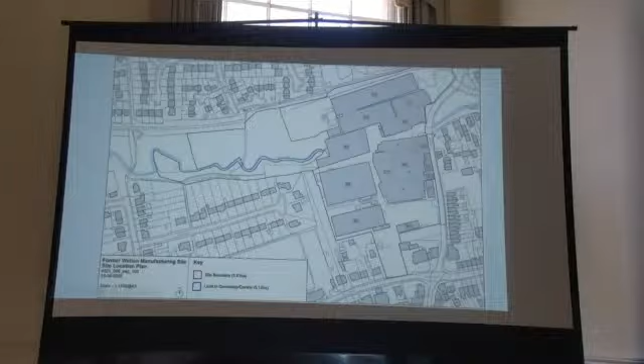Here we can see the existing site. It's the former Welton Bibby Bag Factory, just north of Midsomer Norton High Street, which is just to the south down here. We've got Station Road, which runs along the eastern side of the site, and you can see the red line boundary of the site just encompasses Station Road along the east here and goes around the whole of this wider site as well.

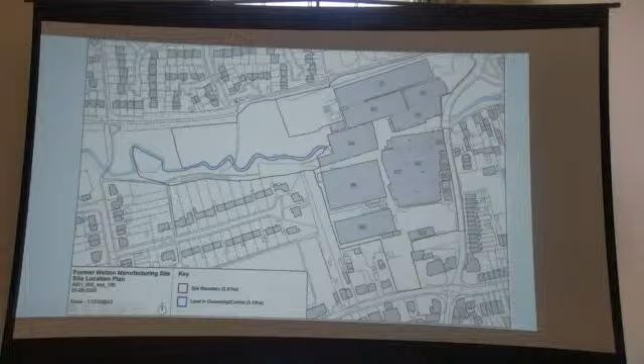We've got the Welton Rovers football club down here. We've got Welton Vale and the Midsomer Norton Conservation Area just to the east, the boundary of which runs up to and includes the facade of the brewery buildings, identified in this area here. I'll show you in a bit more detail, and then it comes around this building here and follows the road down.

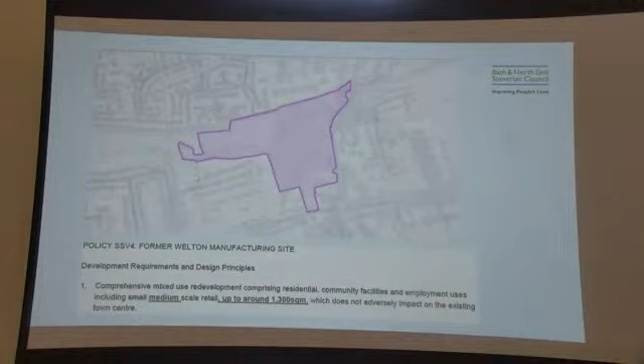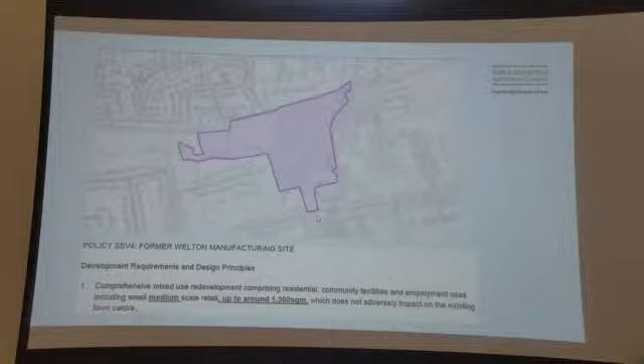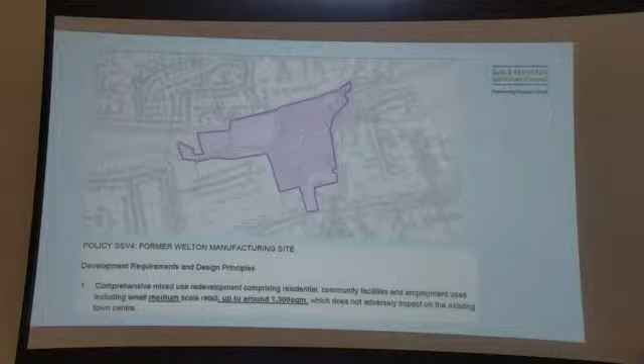The whole of this area outlined in purple here is part of a site allocation in the local plan partial update, SSV4, which requires a comprehensive mixed-use redevelopment comprising residential, community facilities, employment uses and a medium-scale retail use. Now, to be clear, this application is not for the wholesale redevelopment of the site. It is described as enabling works, and we'll come on to consider what that includes shortly.

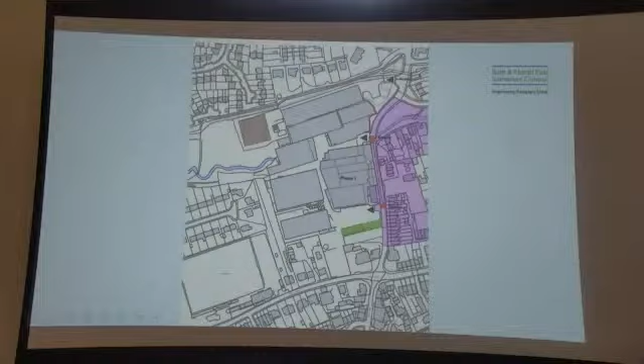Part of the application involves demolition, in this area here, labelled Phase 1. So it's all of these buildings here, which are an assortment of connected buildings of various ages, the most historically significant being these 3 buildings at the front, the tallest buildings, which form part of the former brewery building on the site. You can see in purple here the outline of the conservation area.

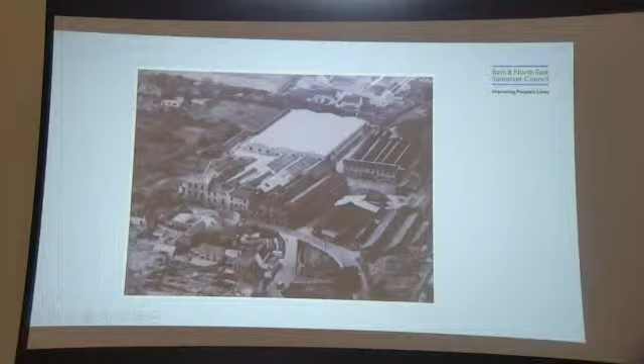And just some historical photos for a bit of context. You can see, obviously, the site has been in factory use for a long time, and you can see the brewery buildings when they were in a little bit of better state than they are today.

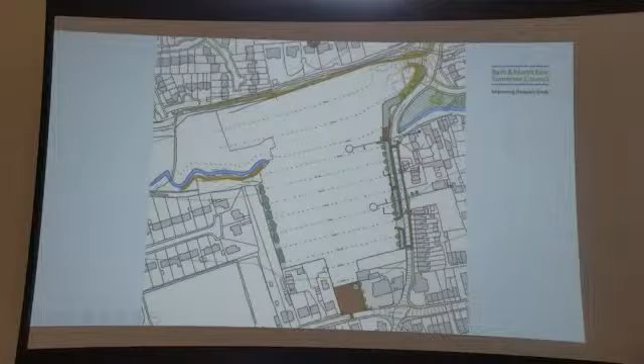But moving on to show in more detail what's proposed. So the eastern pavement would be widened to 1.8 metres. There'll be a new crossing put in here, just to the south of the northern entrance to the site. There'll be a new 2-metre wide pavement on the west side of Station Road, and Station Road itself, the carriageway, would be widened to 6 metres.

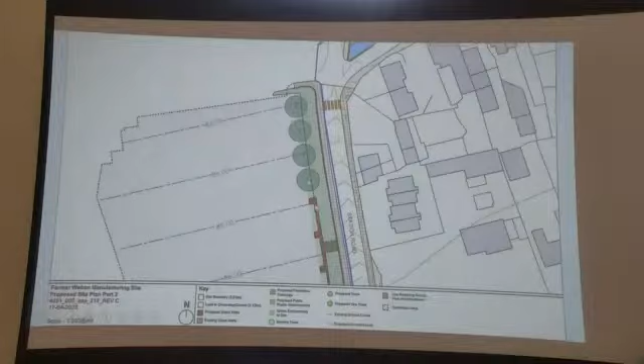Then there would be a low retaining wall put in place at the back edge of that pavement, with a grassed embankment behind, up to the level of the development platform that would be created at the back. And beyond that would be some new tree planting and the rebuilt facade of the brewery building.

Moving further down, so that would continue down to the point of ownership here, which is just to the south of the southern entrance, before we get onto the rear yard that sits at the back of the Stones Cross pub. And there would be another pedestrian crossing here, that would likely be a zebra crossing.

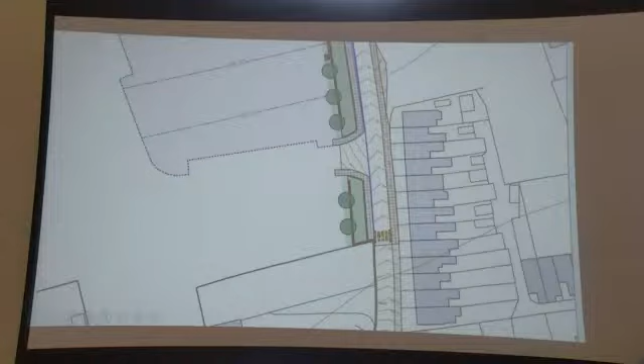Moving on to some elevations. So existing elevations at the top, you can see the existing brewery buildings here, and the modern industrial buildings as well. And you can see the proposals to step that back with a grass embankment, rebuild the facade up to a similar height, albeit slightly lower, incorporating a number of the features that are currently in the facade there, and the tree planting that would sit behind the embankment.

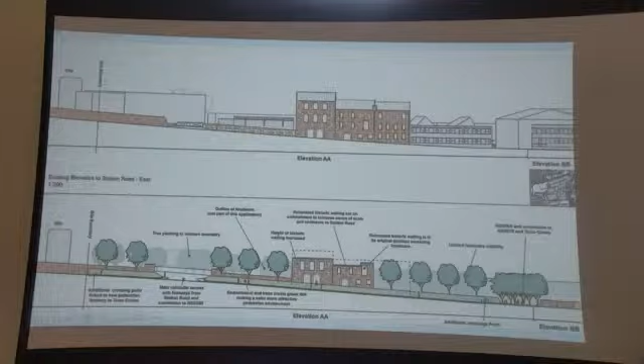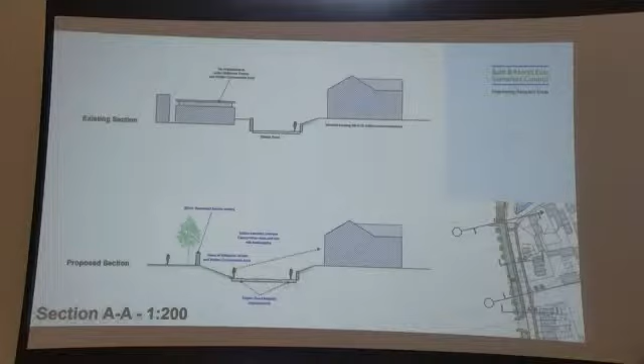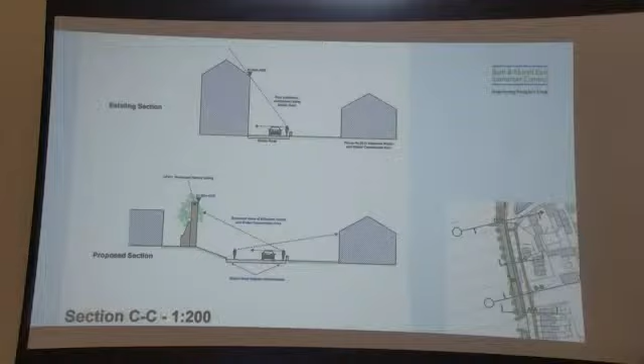And then a section through the area where the facade would be rebuilt. Note the facade sitting at the top of the embankment there, behind the widened pavement. And then just another section further up, looking the other way this time, so you can see the facade is shown on this side in this image.

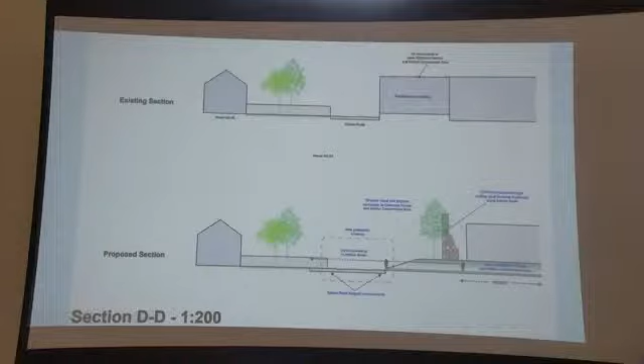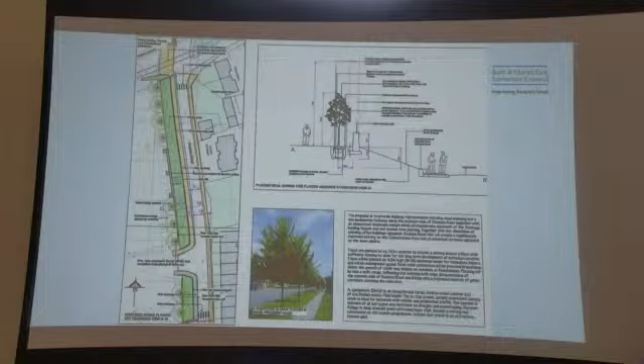And then just briefly on the landscaping proposals, it's proposed to put in a number of replacement trees along the site here to provide a softer green edge to the development site. They've given some details of the tree planting there.

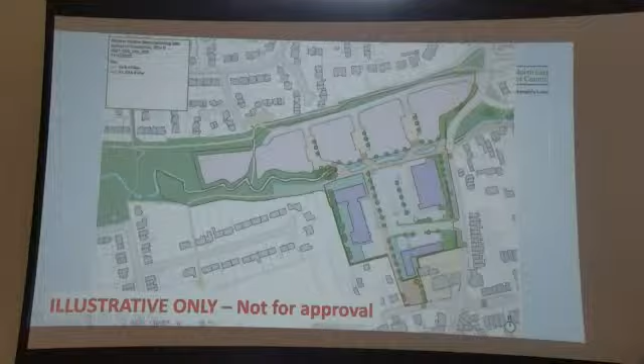So the application is recommended for permission, subject to conditions in a Section 106 agreement. I'm happy to take any questions after the speakers.

Thank you, Chris. And it's not easy to say 'brewery' so many times.